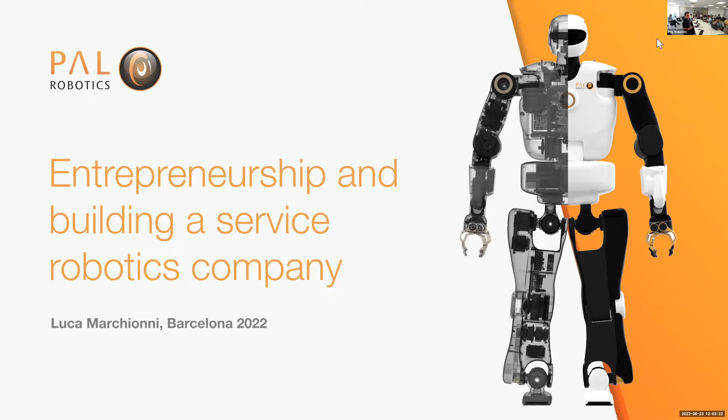Welcome. I'm Luca, I'm the CTO of PAL Robotics, and I've been here since the beginning of 2009. So I've seen a little bit all the changes and evolution of PAL Robotics as a company.

So I studied robotics in university. This was my big dream, to find a place, a company where I could do what I like most: developing robotics from a mechatronic, from a software point of view, and building useful robots.

I started getting involved in robotics because one of my activities during my studies was participating in RoboCups, competitions, and that's where I actually got involved in Linux open source software and collaborating with different universities. It was really nice. I started traveling for competitions to Japan, to different places in Europe, and I saw there was a lot of growth in this community.

Then after my master's, I started working in a big company, Fiat, in Italy. Engineering and design is a super huge department in Fiat that does everything related to design, conceptualization, and electronics for the car industry.

There were things that were really interesting, because you see cars inside are robots too. Even though at the time there wasn't yet interest in autonomous navigation, there were already a lot of robotic components. I was mostly involved in robotic gearboxes, and also everything that converged into what is now the start-stop functionality, so the car switches on and off depending on conditions. At the end there was a huge state machine with sensors and a lot of logic and intelligence in that, and it was really nice.

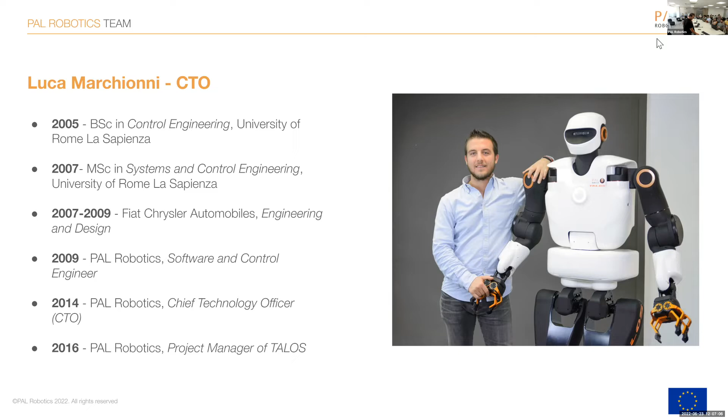A little overview of the presentation: the company, the first robot that we developed, and then going more in detail about the software and what we do in terms of activities for European projects, development of some platforms, and then also the competitions.

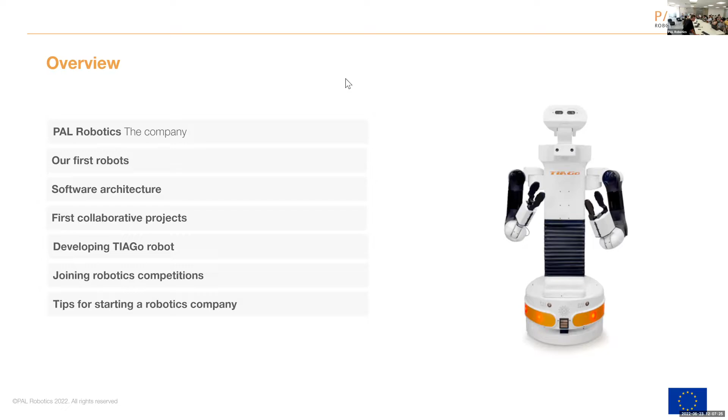Our company - I don't know how much you know about the company - was started in 2004 by 4 guys, 2 Italian guys and 2 Catalan guys.

I don't know what happened. I clicked where I didn't want to click.

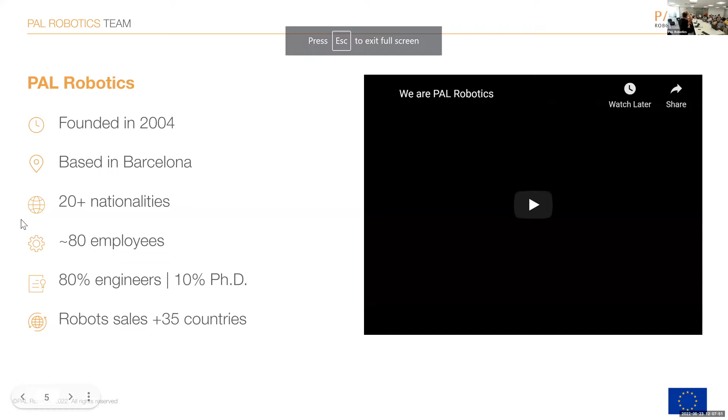Two Italian guys - one was Davide Faconti, the original founder, an Italian electronic engineer who was doing his PhD in Brussels. He got contacted by a company in the UAE that wanted to build a humanoid robot, and nobody in the world - at least they contacted many universities and many engineers - but nobody accepted the challenge apart from Davide. Davide was a really good friend of Francesco, and they decided to come to Barcelona because they liked the city.

They never visited the city before, but they heard that Barcelona was a nice place to start a company. So they came here and found two other guys at UPC, the Polytechnic of Catalonia, the University in Catalonia, and they started the company. In a few months, like 8-10 months, they managed to have the first prototype.

That was the Reem, and then everything started from there. They managed to get more funding for another prototype, and so on. Everything started step by step.

Now the company is a little bit more complicated. We have different business units. A business unit for us is a vertical segmented depending on the type of customers or type of market, the application we want to reach. This is something we started organizing especially for making people from outside understand our plans for the future.

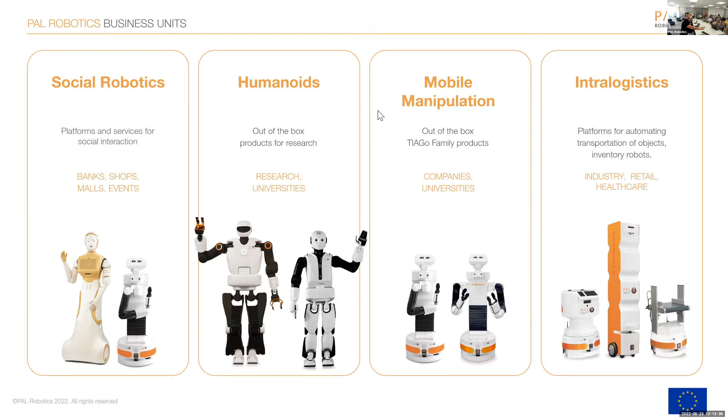We have several other configurations with the same mobile base, but with different accessories on top, from conveyor belts to shelves and different types of accessories. This is a little bit the evolution of our portfolio of products, even if they are not quite products, because many of them are always customizable.

You can add the sensor, you can add different end effectors, but you can see also that we are quite diversifying the portfolio. So we have from small mobile bases up to full-size humanoid robot, and then most recently, advanced legged systems, in which we are exploring smaller size robots with a solo quadruped, but also more performance or agile robots with Kangaroo.

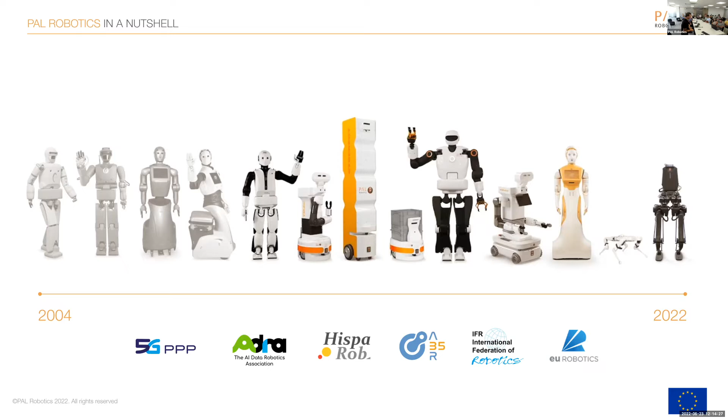That is a concept with a completely different actuation system that we would like to use for demonstrating electric actuator capabilities in terms of jumping, running, and even resilience to faults.

The first robot started very many years ago, in 2004. The company was in a flat in Barcelona, a typical flat. I remember that I did the interview in that flat, and they were famous because they had these videos of

And then they started traveling a lot. They went to Los Angeles, San Francisco, the US, trying to get funding, trying to get new projects. And then thanks to the success of REEM-A, this is Francesco, almost 20 years ago, who is now

the CEO of PAL Robotics. And then after REEM-A came REEM-B - the names weren't that original at the time, so they always added a new letter. The main difference with REEM-B is that it was way more powerful in terms of actuators, especially for the upper body, and also in terms of sensors, because they started working on autonomous perception and manipulation of objects.

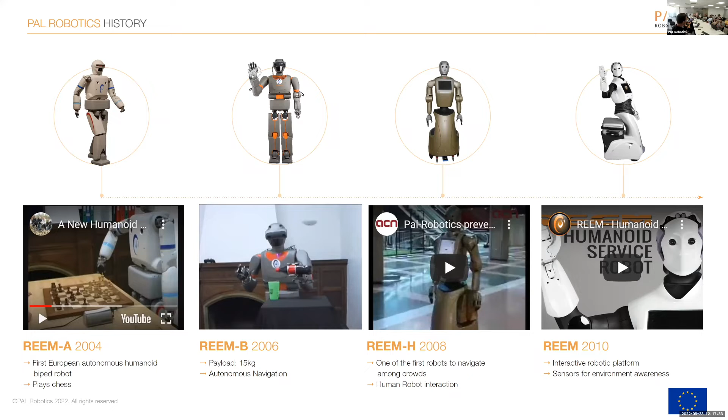a REEM-H for REEM Hotel. So the idea was that the robot was a dynamic information point, an autonomous guide, an interactive service robot for public spaces, especially museums or hotels. And we started with this prototype that was a little bit retro because of the color.

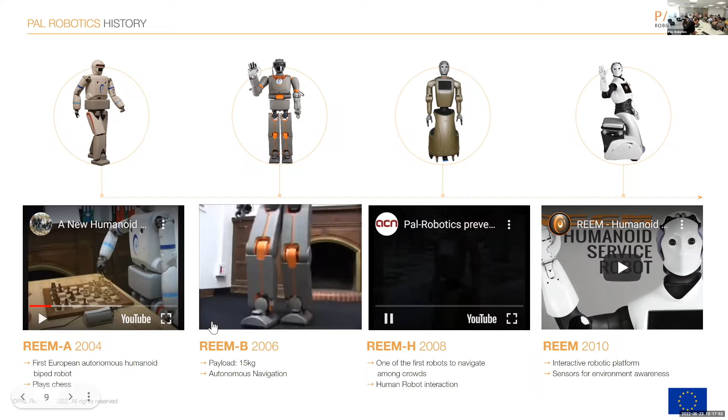Actually, we got the inspiration from some movies, but it was nice - though still really expensive.

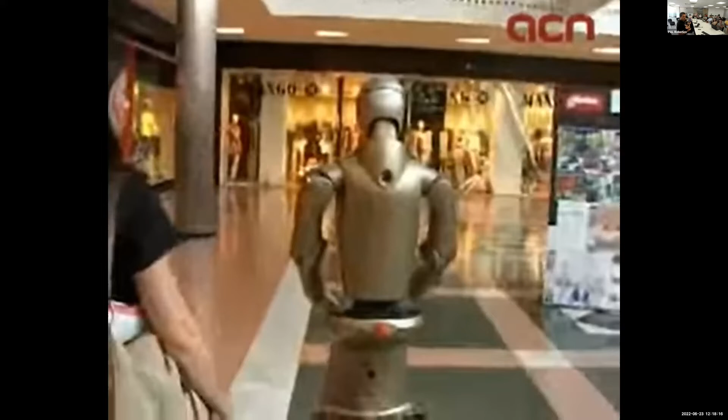And then we found the limitations, both in software architecture and functionalities, because at the end the robot was an expensive toy with few functionalities, and the interaction was not really fluid with the users, so it was not successful. We didn't manage to sell many units of this, but we did a lot of experimenting, especially with

the next prototype, the REEM series of robots. We did like 100 events every year, we were traveling a lot, we got a lot of feedback and press coverage, and that helped us at least understand what we did wrong.

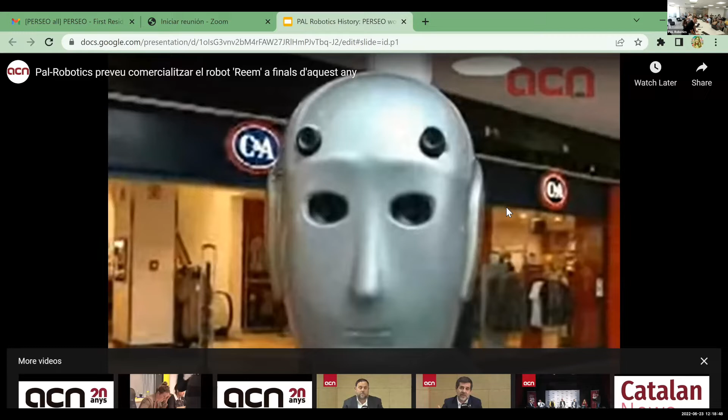And then the new prototype started. It also still had limitations because it was still expensive, but it helped a lot in shaping the technology we're using, because at that time there was no ROS, there was no 3D printing - there was not much of the technology we are using nowadays that is accessible and helps us prototype quickly.

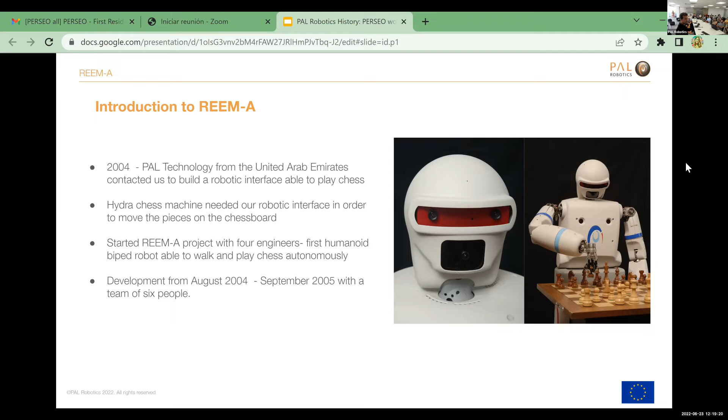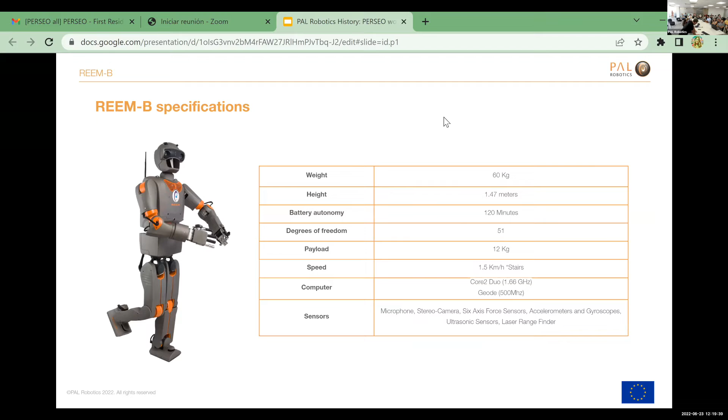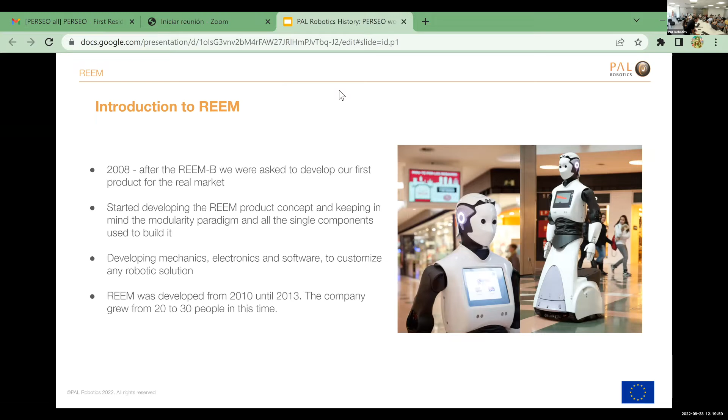Functionalities were not present yet, so we started looking around and found interesting technologies. These are the specifications of the first robot. I think the lesson we learned is that you can build a complex machine, a complex software architecture, but then you need to maintain it. You need to spend a lot of time on small details, and that moves your focus away from the real problem you want to solve. So the lesson is that on one side you need to simplify, but you also need to understand where to invest time and money.

So we started growing a lot from a software point of view, especially thanks to our involvement in the ROS ecosystem. We started adopting ROS since almost the second or third release of the software in 2010, 2011. We started understanding how to modify ROS, or what was missing in ROS, because not all users of ROS had the same issues we had about quality and real-time control. So this is a bit of the ecosystem of tools we have been using and are still using nowadays. ROS is one of the big blocks, because all our robots are ROS compliant.

Then we have the simulation in Gazebo, which is also available open source. Everybody can evaluate our robots just by downloading the URDF and launch file for simulation from GitHub. ROS Control was an important building block, because with this we managed to combine the real-time control we needed for many degrees of freedom, especially for humanoids that have demanding needs for balancing and collision avoidance, plus additional tools helpful for development, like MoveIt for motion planning of the arms. Then for quality, GitLab for version control, Jenkins for continuous integration, and more high-level perception-oriented libraries like OpenCV and PCL.

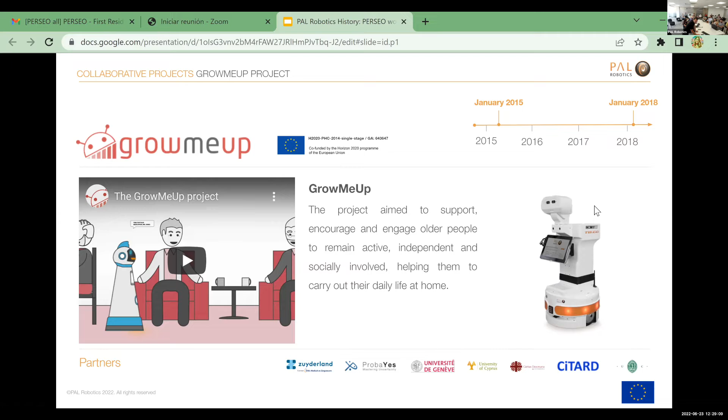residents. Then another project, also quite interesting, in the healthcare environment, in which we are thinking of the robot as a tool for caregivers to serve multiple patients from a remote location. So the idea of supervised autonomy, or the possibility that if there is a need for the robot to do a complex task, the caregiver can actually teleoperate the robot with a cockpit that has different sensors and a haptic device.

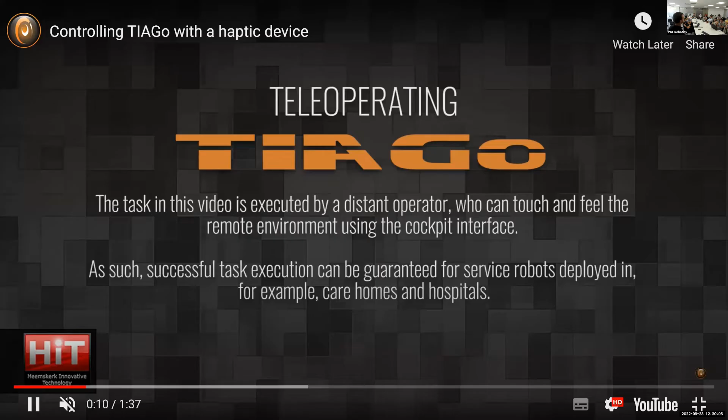One of these, for instance, is visible here. So this idea - we started maturing the thought that we need to have force control and force feedback, especially if you want to do an interaction task. So we started thinking, okay, we need a force-torque sensor in the wrist, and we need to make the operator feel what the robot is doing in the environment.

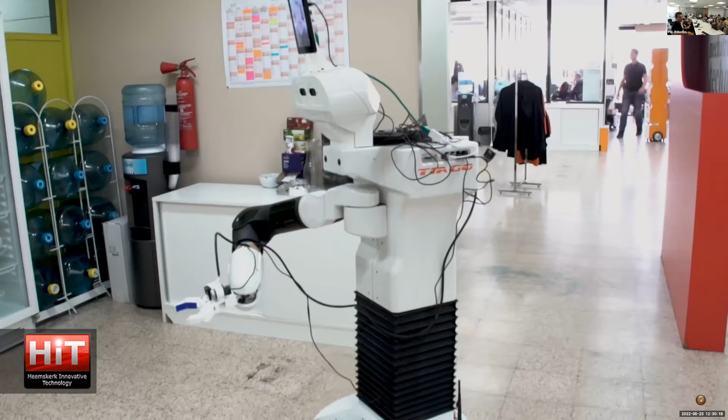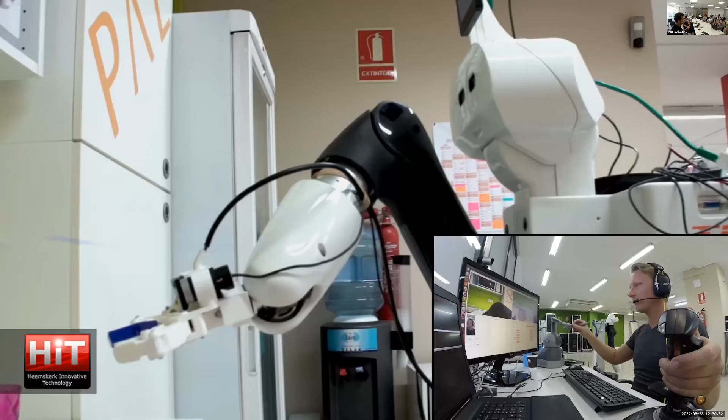So imagining here, we were trying to simulate the operation in a kitchen. The robot has to open the washing machine or manipulate objects, and the operator, as the robot is not yet able to do that autonomously, can help. But the operator needs to understand very well what the robot is doing when interacting with the environment.

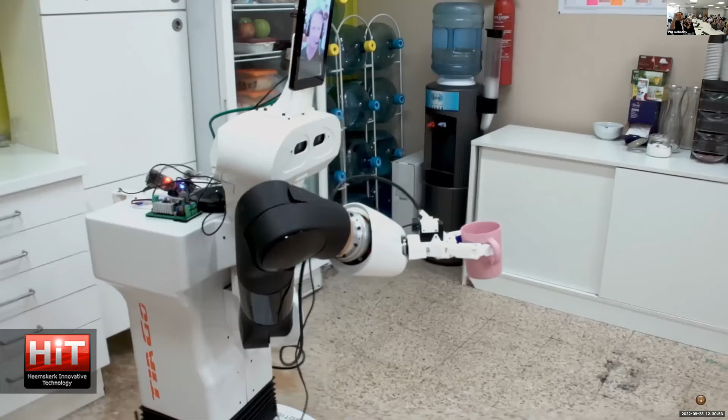So we started adding sensors on the robot, using Tiago as a prototype for rapid testing of different technology. It was nice because this guy is one of our partners in Delft in the Netherlands, and there they have this need of caregivers for all the population that is aging.

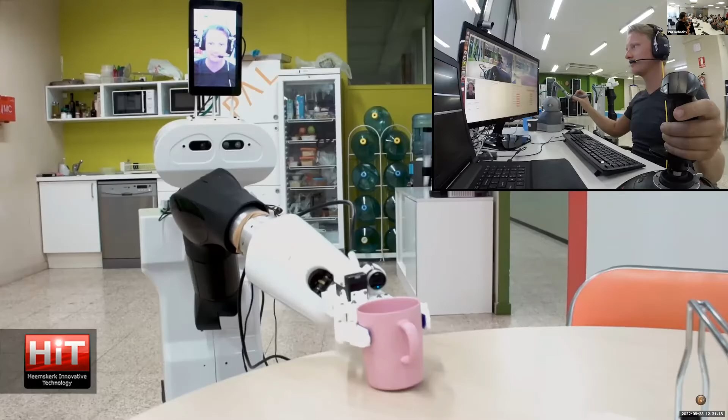Actually, one of the backers of this project was the National Security Agency in Netherlands, because they believe this is something we need to spend money on, to try to make a robot that helps reduce the cost for social security, because it's a cost for society in general that someone cannot be more independent. So they have this vision, and we share this vision.

And actually, I think this was the first project in this direction, Sacro. Then we had Sandro. Then now we have Sandro 2. So actually it's not only one project that we have normally in this type of application, because with one project of 2-3 years, you cannot do much. You need to have continuity. You need to create technology, then build on top of that new results, understand, and make mistakes. That's a little bit the philosophy, that one project doesn't end after the project.

If there are good results, we can exploit them. If there are no good results, but you learned a lot, you can then create a new project based on that lesson. This is a little bit the philosophy, and it's exponential. For this reason, we started with one project in 2004, and at the moment, I think we have 20 projects.

And it's complicated. It's complicated because at the end, you need to have clear ideas about what to do. Now, I don't have a clear idea about how to stop this one. Can I? Okay.

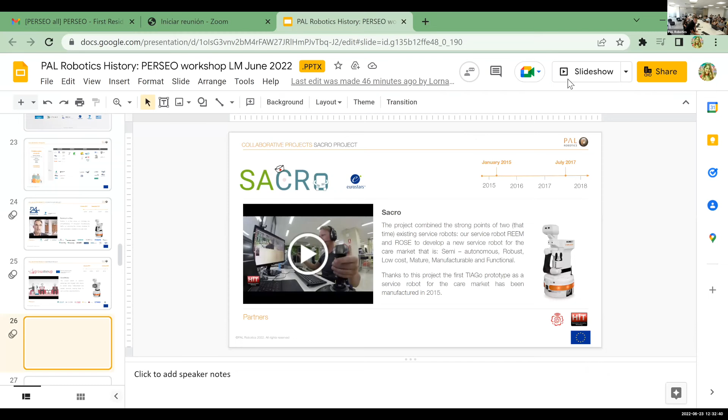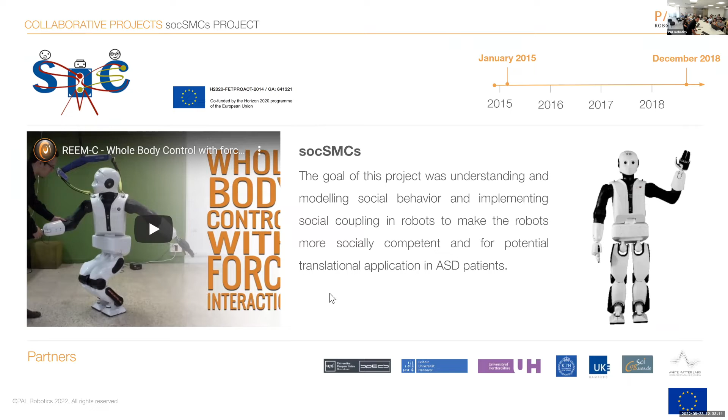And also then human and robot in social application. This was more, let's say, cognitive social behavior, like understanding the intention of a human and trying to interact with a human and robot in interaction tasks with the human, especially for patients or people with cognitive problems.

One of the good results of this initial European project and collaboration was that we understood there was a need for mobile manipulator platforms. And we were not the first to understand this. Willow Garage had the PR2, which was the first, let's say, service robot as a product, though they didn't build many units.

They distributed units to several universities in the US and Europe. They had really good results because the robot was able to do autonomous navigation, motion planning, fold clothes, clean the kitchen, cook. But then Willow Garage disappeared because of funding problems. Many small spin-offs were created, but few of them were able to develop a robot that could do autonomous mobile manipulation.

So with Tiago, we started with this idea in mind: can we build a robot that is affordable, mobile, and can do manipulation? We interviewed many researchers, many professors, especially in Europe, people we knew, people we found at conferences and trade fairs. So actually, Tiago is the result of a survey in which people tried to give us ideas about what a robot like this could be.

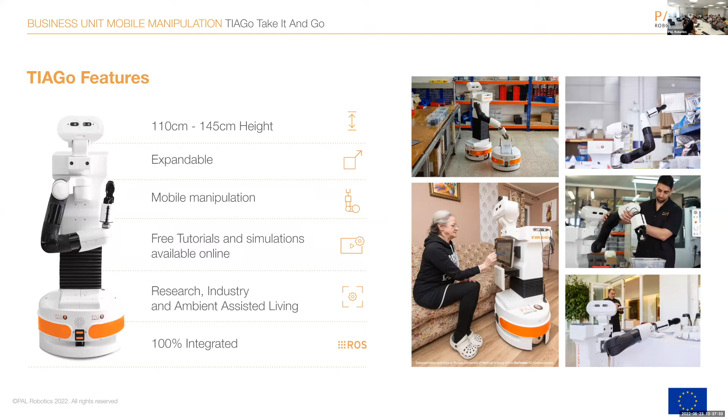If we manage to accomplish that the robot is, let's say, interesting enough that you can build a robotics course around it, even if it's for free in an open source simulator, that's already something we should be proud of. And then one of the main characteristics of TIAGo is the high modularity, or let's say configurability.

Actually, this is not even complete, because now we have an additional base with omnidirectional wheels. Then you have several configurations for the head, for the torso. You can have one arm, two arms, the touchscreen, and especially for the end effector we have several configurations. We have much more components, and we also added recently the robotic fingers and the vacuum suction gripper.

This is a little bit also the strength and the complexity of PAL Robotics, that as we do everything in-house, we can modify the robot as we wish, or at least as we can. This is something we can do because we do mechanics, electronics, software, and aesthetics - we have a little bit of everything in the company. So this is quite special and is a strong selling point compared to other competitors.

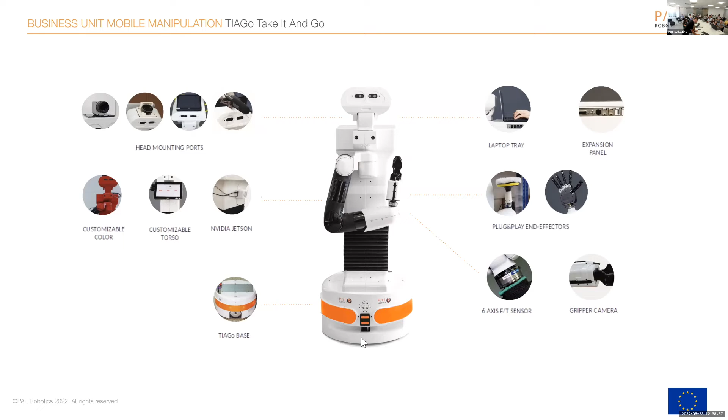These are now the configurations. As I told you, this is the latest version, with the omnidirectional base and two arms. That is getting a lot of interest and attention, especially for mobile manipulation - having the possibility to move without nonholonomic restriction in any direction is very convenient, especially if you can combine motion planning of the upper body with the mobility of the base.

And then competition - another big part of the success of TIAGo is competition, because what we started doing is providing the robot as a standard platform for several competitions. For us that was a big challenge. On one side we had to build robots in advance, teach or at least train different groups from all over the world to use our robots, and then assist them during the competition. That was even harder, but we started doing this.

It was nice because then there were some nice stories. For instance, in the RoboCup at Home, there is a very nice research group in Koblenz that with their TIAGo traveled all over the world. They went to Japan, they won in Japan. They went to the US, they won in the US with minimum support from our side. So actually they started with our help, but then they reached results that for us were very difficult to understand.

They had the robot fetching beers from the fridge. They had the robot cleaning a toilet in Japan. It's super nice that students and researchers - and then also in ICRA, they had the mobile manipulation challenge, in IROS, the SciRoc project.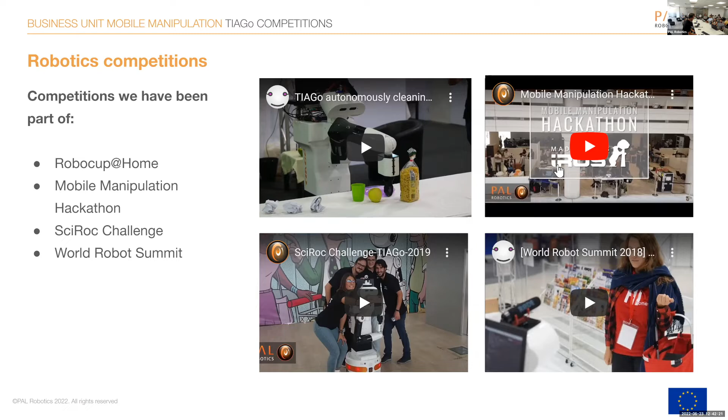And mobile manipulation is the next challenge. For this reason, we are betting a lot on mobile manipulation, especially on articulated robots. We are still interested in humanoids, and we believe that the mobile manipulator of the future will have - I don't know if only legs, but at least should be able to traverse more complex environments than the ones that we are thought for mobile robots.

So at the moment we have this very different family of robots: the TIAGo robot, a mobile manipulator. Then we have the ARI robot that we are focusing mostly on social applications - human-robot interaction, expressiveness, emotional content and communication. But there should be some convergence of these two lines of ideas in the future, because in the end, a service robot, as I told you before, is something complex enough and flexible enough that it can be used in many different situations, depending on the environment, the people, and the interaction.

Now, about suggestions if some of you want to start a robotic company - I think it's complicated, but today it's easier than it was 20 years ago, because we already have many examples of successful stories.

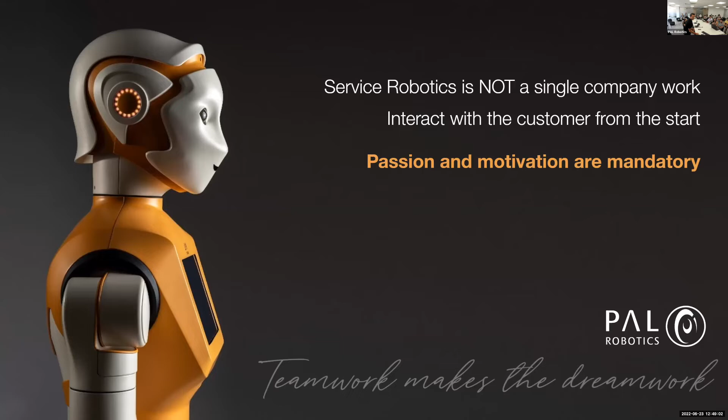And then for sure, as you may understand, service robotics is not a job that we can do alone. So for sure, a rich network of partnership and collaboration is still mandatory. We cannot think about getting isolated in our room and design and build the best robot in the world. We need to get out, to understand, to see what others are doing, to ask for help when we see someone that is better than us. And especially, we are continuously making mistakes, so the mistakes are the first step to learning lessons and to improve.

And that's it. Sorry, yeah, something.

If you have any question, maybe we can... I actually have one question. Can you go back to - which one? Just before the final slide? Sorry, okay, so here.

You also mentioned it - consider open source code, but for starting a company, if you go open source right from the beginning, then if your idea is innovative and has value, chances are there are competitors that would like to use the same code or structure or achieve the same result, and maybe already have some platform. How would you cope with something like that?

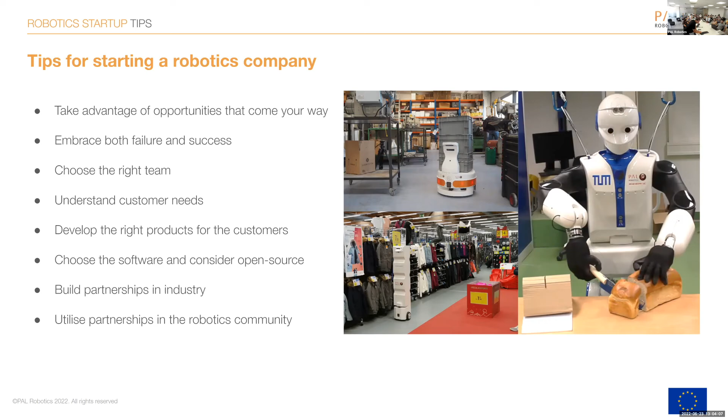And then also from more, I would say, a user's perspective, we recently started giving a lot of attention to graphical user interfaces or ways of programming the robot in a more simplified way. So especially for ARI, we have all this kind of architecture of the software, like there was an image before.